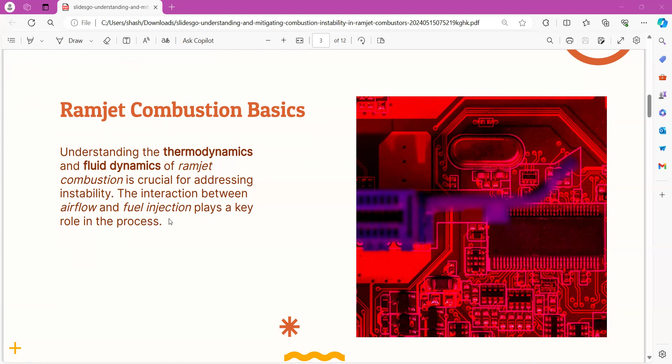Causes of instability. Factors such as flame holding, pressure fluctuations, and combustion resonance can lead to instability in ramjet combustors. Flame holding. As I've earlier told, ramjet combustion cannot be performed or utilized in the phases of takeoff and landing. When the aircraft has achieved a higher Mach number, the ramjet comes into operation and there needs to be good flame holding for the combustion to start.

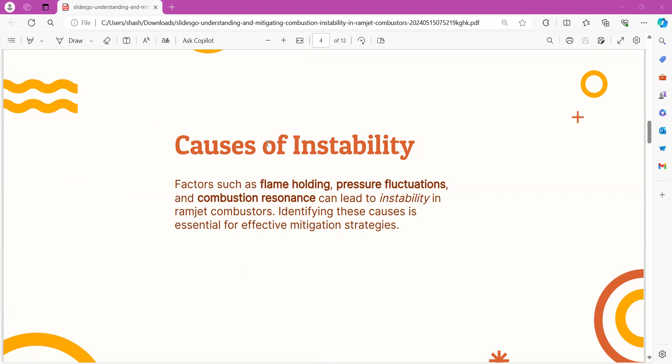While there is a gradual increase in the velocity and gradual decrease in the area, there might be a large number of pressure fluctuations throughout the combustion propulsion system. This causes an instability in the combustion chamber. And one more great reason for this instability is combustion resonance.

Effects of combustion instability. Combustion instability can result in flame out, excessive vibrations, and loss of performance. Flame out. Due to high speed airflow in the combustion chamber or through the inlet, there are lots of chances that the flame goes off, which may lead to no combustion in the chamber, and there needs to be more fuel or more spark or excessive flame allowed in it.

Excessive vibrations due to high pressure fluctuations in the combustion chamber or the ramjet propulsion system. There might be excessive vibrations in the system, leading to structural damage too, and loss of performance. Because of this combustion instability in the ramjet propulsion system, we may lose aerodynamic performance and aerodynamic characteristics, which in turn lowers the efficiency.

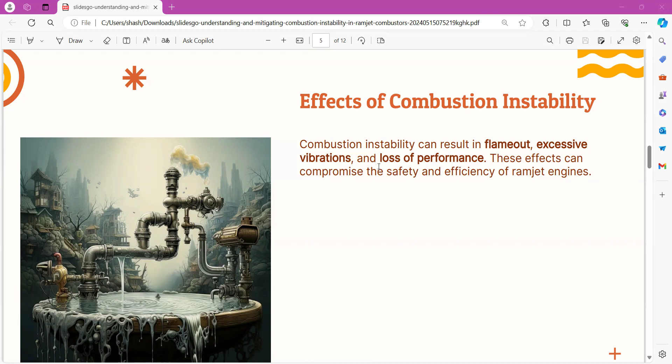These effects can compromise the safety and efficiency of ramjet engines. When there are excessive vibrations in the ramjet propulsion systems, it leads to structural damage. In turn, the safety of the engine and the efficiency are decreased.

Diagnostic techniques. We've observed the causes and the effects of the instability of the ramjet combustion chamber. Let us go through solutions and a few diagnostic techniques to resolve the problem. Various diagnostic tools such as pressure sensors, spectroscopy, and high-speed imaging are used to analyze and understand combustion instability in ramjet combustors.

Pressure sensors are placed in various parts of the ramjet engine, such as the inlet, nozzle, combustion chamber, etc., to understand and determine the pressure all over the body and optimize it. Spectroscopy and high-speed imaging are also used to analyze and understand combustion instability in ramjet combustors.

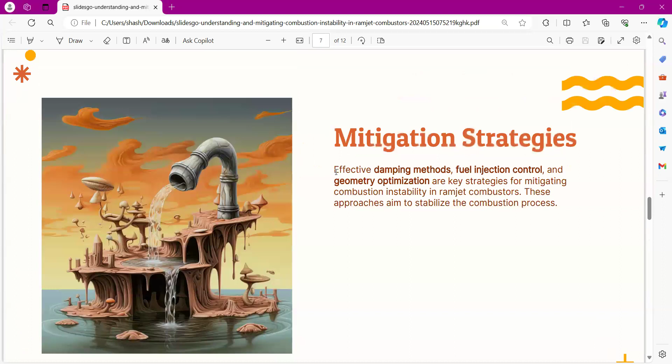Experimental validation. Experimental testing and validation of mitigation strategies are crucial for assessing their effectiveness in real-world ramjet combustor environments. These tests provide valuable data for refining mitigation techniques. As we've seen, there are lots of mitigation techniques and diagnostic techniques to resolve the problems of this instability in the ramjet propulsion systems.

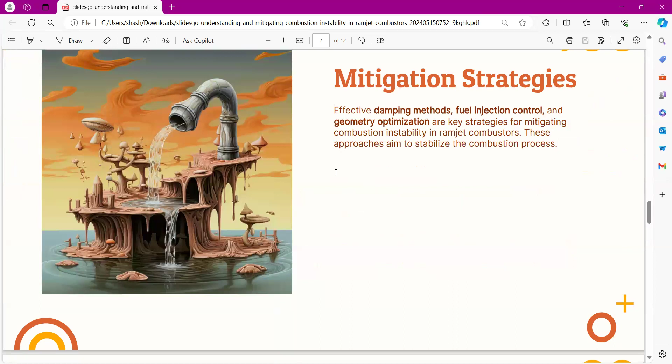But coming to their validation, it must be experimentally approved before getting into the actual aircraft. Because, like, we can use a wind tunnel experiment or many such experiments to validate the working of the ramjet with a good geometric optimization, good fuel injection control, pressure sensors, and high-speed imaging techniques.

Once we put the propulsion systems in the wind tunnel, we can gain a lot of information, and we can again optimize it for better validation and better performance of the propulsion systems, which in turn increases the performance of aircraft. These tests provide valuable data for refining mitigation techniques.

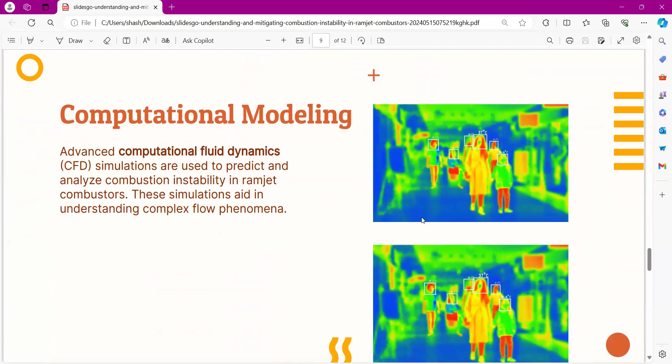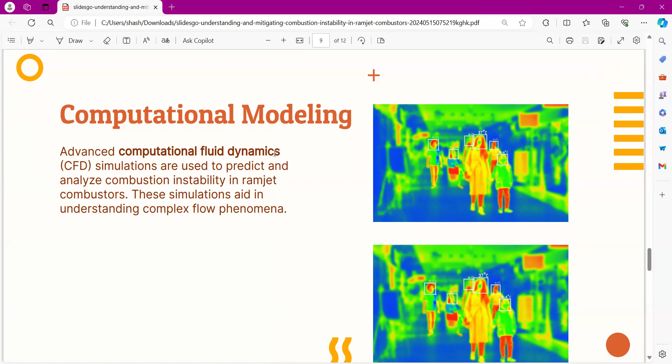Computational modeling. Advanced computational fluid dynamics, CFD, simulations are used to predict and analyze combustion instability in ramjet combustors. These simulations aid in understanding complex phenomena of the flow. If we perform advanced CFD simulations for these propulsion systems, we can gain lots of information rather than just by wind tunnel experiments and normal experiments. CFD is a better alternative for such experiments.

Future research directions. Continued research in advanced materials, control systems, and alternative fuel formulation holds promise for further advancements in mitigating combustion instability in ramjet combustors.

We can use some advanced materials for the structural components, and control systems and alternative fuel formulations. There is a need for alternative fuel formulations for ramjet combustors because the vapors might not properly get mixed with the air, as the air in the combustion chamber is at high Mach number. Though it's less than one, it has a high Mach number, and the fuel vapor might not get combusted properly. So there is a need for future research in these areas.

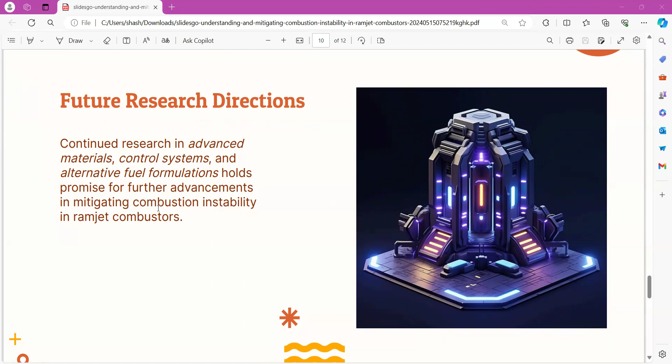Industrial applications. The knowledge gained from addressing combustion instability in ramjet combustors has broader implications for aerospace, defense, and propulsion technology. These insights can enhance the performance and reliability of various systems.

In conclusion, understanding and mitigating combustion instability in ramjet combustors is essential for ensuring the safety, reliability, and performance of these critical propulsion systems. Continued research and innovations are crucial for addressing this complex engineering challenge.